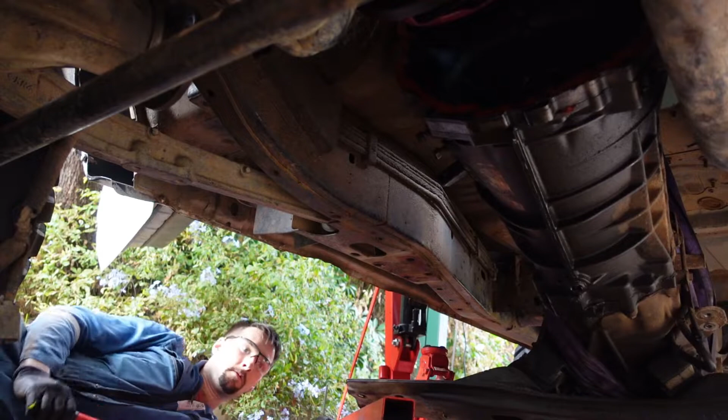In this video we're going to talk about rear main seals in in-depth detail. In my last video you would have seen I dropped the gearbox out of my Patrol in order to redo my rear main seal. When I had the engine out about a year ago, a bit more, I put a new rear main seal in, but I didn't do correct measurements. In fact, I didn't measure at all. I was just, put the seal in, it's going to work. And yeah, it didn't work. So this video is hopefully going to show you that seals are not just this simple install-it's-going-to-work-every-time thing. There's quite a lot of engineering involved behind them, and it takes a lot of preparation for them to work correctly in the environment that they're installed in.

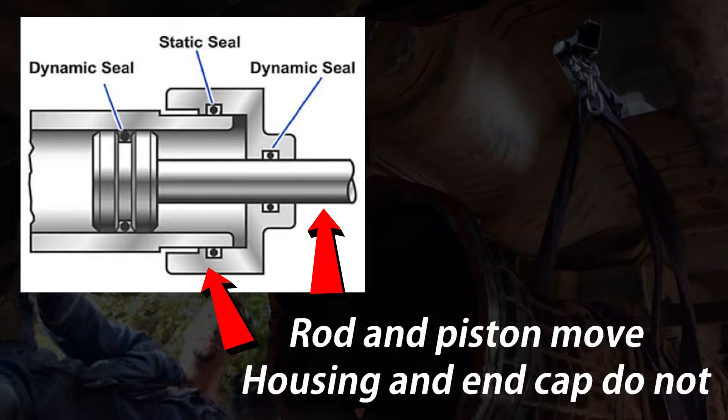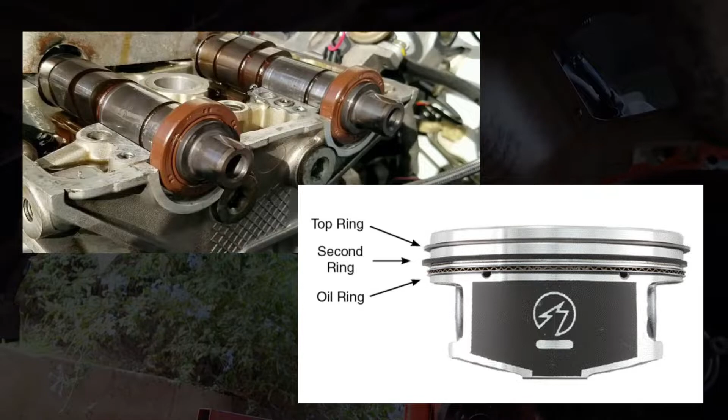So, what is a seal? There's a couple of different types of seals we can talk about. The rear main seal itself is what's called a lip seal, which is known as a dynamic seal. There are two different types, static and dynamic. A static seal is any kind of seal, made of metal, rubber or plastic, that is clamped between two unmoving objects - the best example being a valve cover gasket, simply squished between the valve cover and the head to stop oil seeping out. A dynamic seal, however, seals around a moving component. The rear main seal is knocked into the seal housing, which is static and bolted to the back of the engine block.

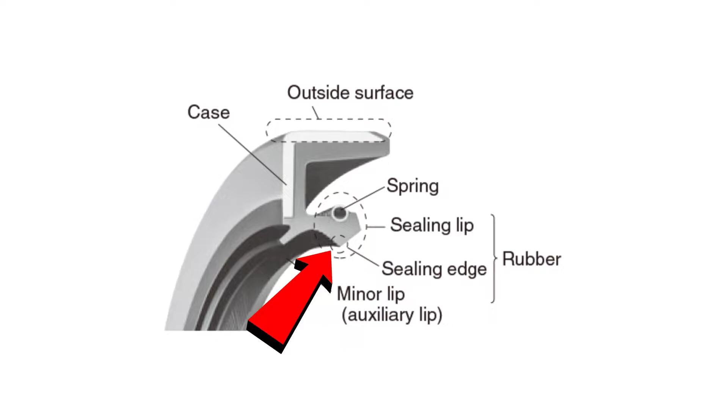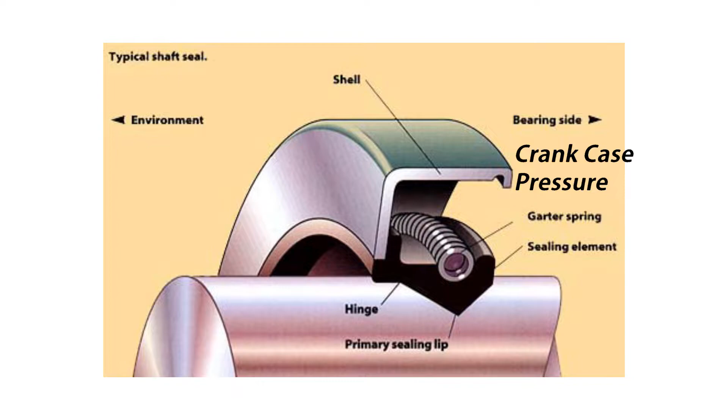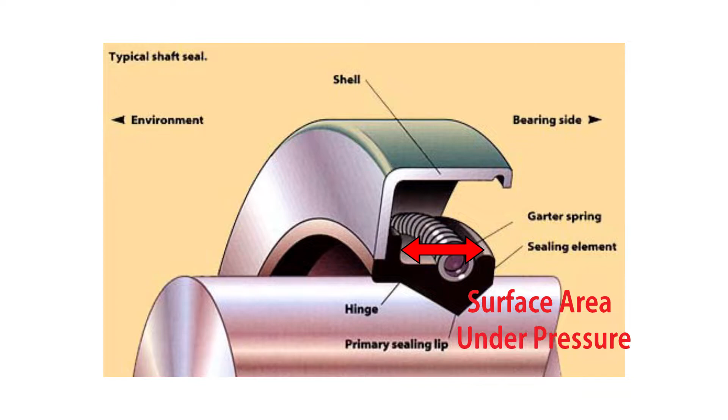The crankshaft which it seals around is constantly moving, meaning it is a dynamic seal. Dynamic seals have a bit more engineering behind them in order to work, which we will talk about, because as I said before, I made the mistake of assuming they were a simple seal, installing one, and it failed on me. So the rear main seal is what's known as a lip seal, a dynamic seal made out of rubber. It has a rubber lip element. When installed, this rubber lip will seal around the crank. There is a bit of flex built into it because it is a rubber lip, however there is also a garter spring around it which creates tension around the lip to hold it around the shaft and stop any potential leaking bypassing the lip. Part of the lip seal design which makes them effective is that because the lip faces towards the engine, every engine will have some proportional amount of blow-by from the combustion process. Blow-by into the crankcase creates a positive pressure, and in this case the positive pressure will aid the lip in sealing onto the crankshaft, because of the area on the inside of the lip seal compared to the outside of the lip seal.

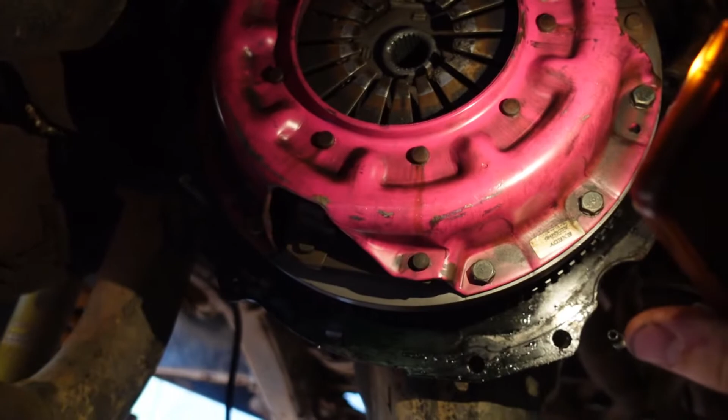Okay, so now's the time to remove your gearbox. If you've watched the last video that I made, you'll know how to drop a gearbox out of a GU Patrol. That being said, this video will cater to any rear main seal, providing it's a lip seal. All you've got to do is rip your clutch off, rip your flywheel off, and we'll go from there.

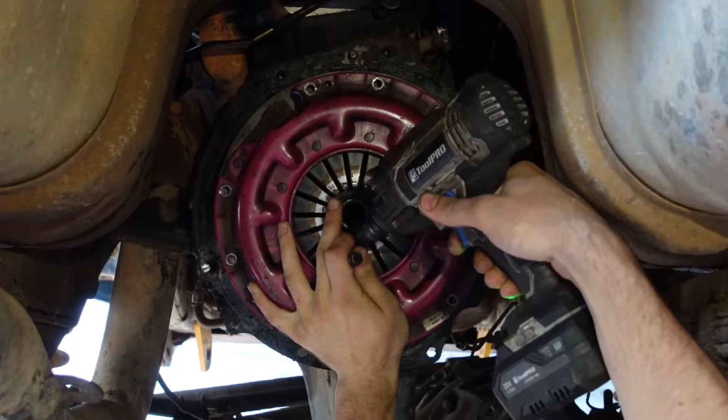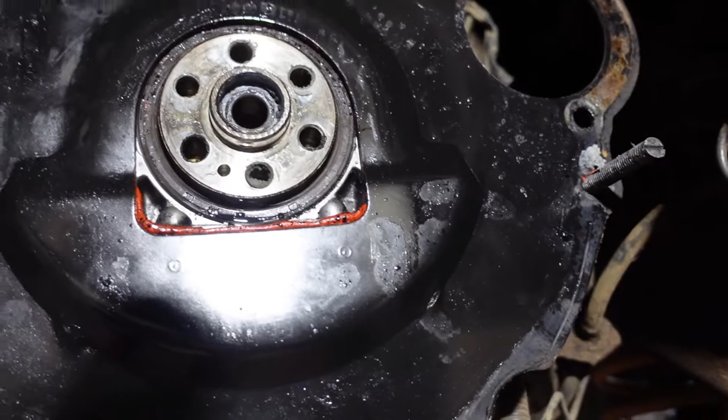Well, there's the problem there - the speedy sleeve is pulling itself off as I'm prying this off. The speedy sleeve should be a press fit onto the crank, so that's probably where the problem's stemming from.

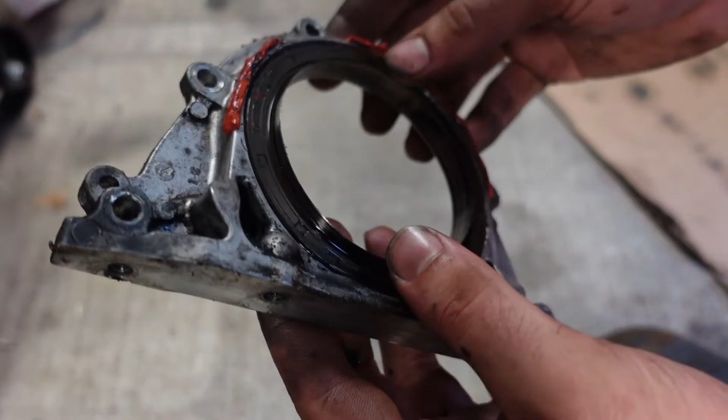So now that we're looking in the light, what you can see is that the speedy sleeve itself has pulled off with the assembly. So the problem is here, the speedy sleeve is meant to be press fit onto the back of the crank. It seems like the last owner that put the speedy sleeve on was leaking oil from the original rear main seal without it, so he threw one on, but he clearly didn't pick the right sized one.

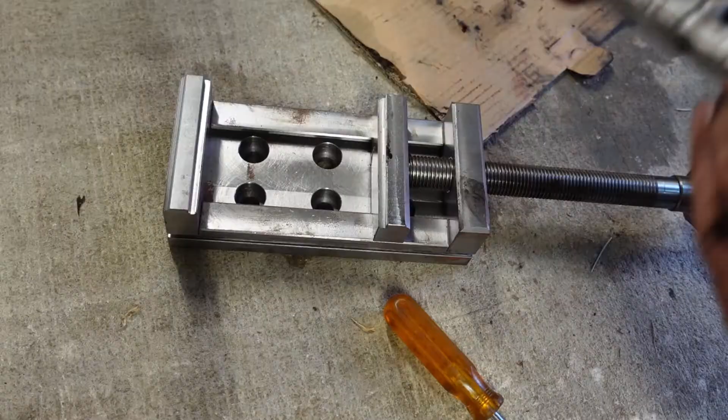So what I'm going to do now is try and pull out the seal. Might need a pry bar of some sort, and we'll inspect the speedy sleeve and the rear main. I've set up my rear main seal housing on a machine vise that I made as one of the components of my TAFE.

Normally, if you're pulling out one of these seals, you can sit the housing straight down and use a seal pulling tool and rock it, and it'll pull the seal up like that, going around it. But in this case, I want to try and preserve the lip element, because I want to see if it was actually malfunctioning and not sealing properly. I also want to visibly identify the sealing area on the lips of the speedy sleeve itself. So I'm going to flip it over, sit it in my vise like so, and use a screwdriver on the back side of the seal, hopefully, and punch it out with a hammer.

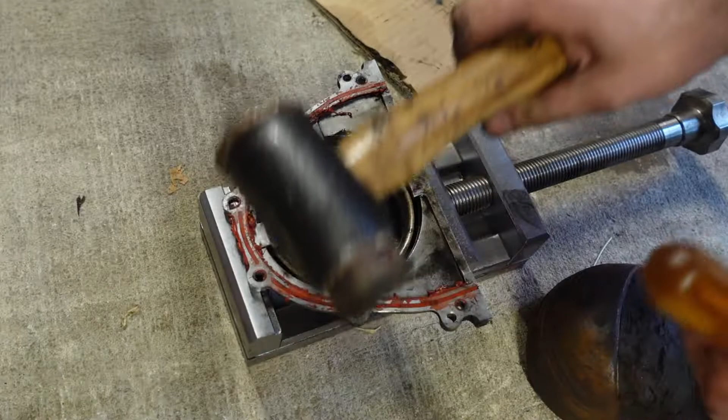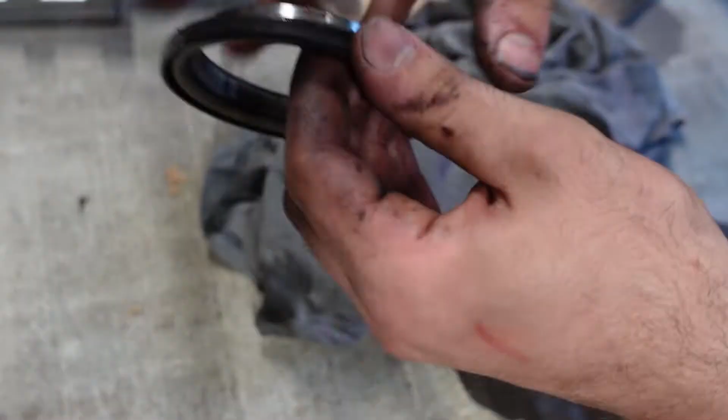I have bought a new seal housing, but it's always a good idea to try and preserve your components as best you can. So now if we wipe everything off, we'll slide the sleeve out, and let's take an examination of this lip here.

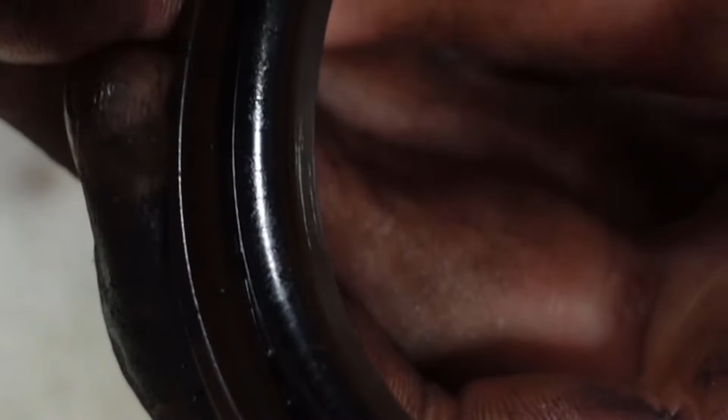In most cases when you run a speedy sleeve, you'll press it on and it'll stay there for the life of the vehicle. But it's pretty clear in my case that was not happening. With the rear main seal I put in when I had the engine out, let's see if I can get the camera to focus on it. What I think's happened is it's ridden itself up on the back corner radius here on the speedy sleeve, and dug into this groove here, you can hear that, and that's caused damage to the seal, and in turn caused seal failure.

However, I think what's also to blame is the fact that the speedy sleeve wasn't a press fit, meaning there was ability for oil to bypass. And considering that my engine is pretty old, it breathes kind of heavy, there's a lot of blow-by, and reasonably high crankcase pressure, it was just pushing past the loose speedy sleeve.

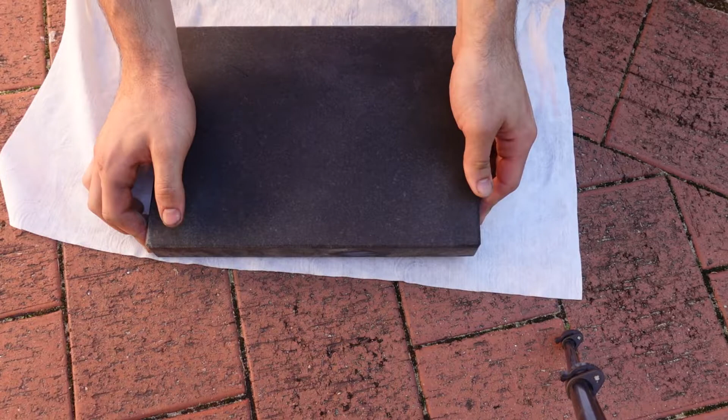An extremely high recommendation of mine would be to go out and source yourself a surface plate. A surface plate is a completely uniformly flat, or almost uniformly flat, plate, used in any engineering sense where precision measurement is required. You can get granite or cast iron surface plates. I preferred the granite one because it's not going to corrode or rust. A good surface plate is surface ground almost perfectly flat, with the difference between the highest and lowest points smaller than 2 microns, which is 0.002 of a millimeter, also known as a bee's dick.

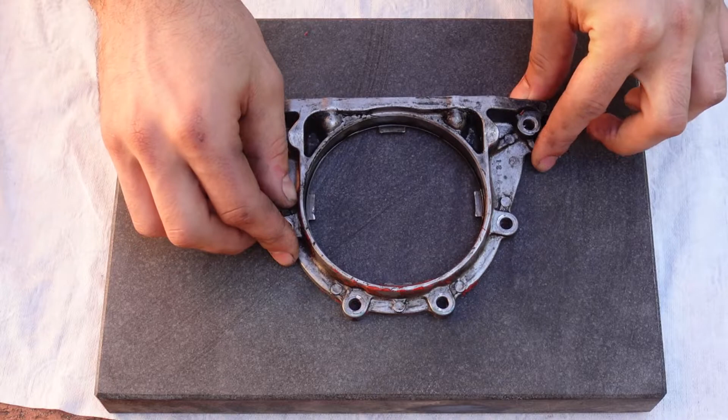It just makes precision measurements, or even just measurements in general, much more precise and much more satisfying, because there's a few tricks you can use this plate for. One of the first tricks is gauging audibly if a piece that is meant to be flat is indeed flat. The way you do this is you sit the piece on the plate and then just tap it around with your finger. If you get any kind of clicking or feedback sound from the workpiece, this tells you the piece is not flat, because if it was perfectly flat, there wouldn't be any high spots allowing it to rock back and forward and create the audible sound.

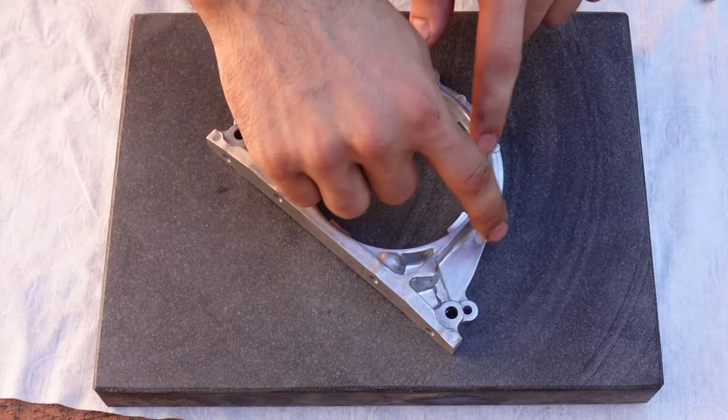The next really good trick that the surface plate allows you to do is utilizing what's known as engineer's blue. This is blue dye, a thick oil mixed with a blue dye, I think it's called Prussian blue. This is marking out blue, which is used for anything where contact is gauged.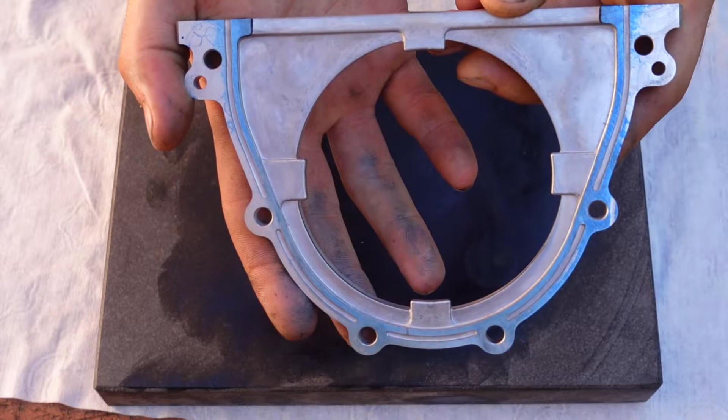With the blue spread out nicely, we're going to rub around our rear main housing. As you can see, once I pull it up, there's perfect uniform blue all over the sealing area on the rear main housing. This tells us, because it's a new piece, that it is perfectly flat from factory, so it passes my QC inspection.

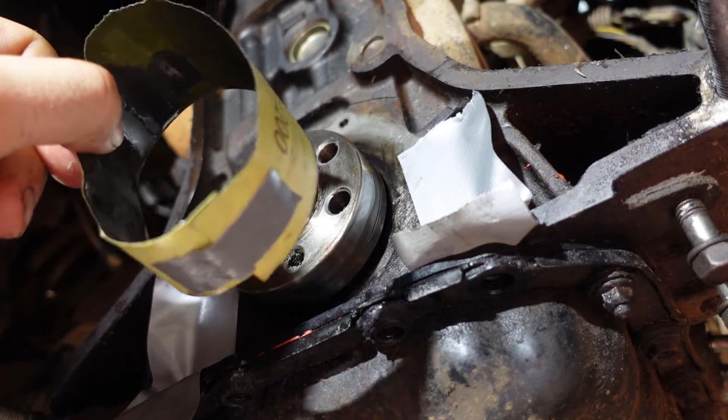Before we take any measurements of the crank journal, we're just going to give it a polish. Using 1000 or 1200 grit emery paper should be fine. A trick to polish up round journals with emery paper is to get two pieces, sticky tape them together at the exact outside diameter, put them on, then use a bit of string wrapped around once or twice so you can go left and right, which spins the emery paper around and polishes the whole crank journal evenly.

If you do it by hand with just one piece, this will be more than fine. It's okay to do this, just try to polish the same amount on both sides. There's not really much chance of creating a high spot because it's only 1000 or 1200 grit paper, but it's good practice to always try to evenly polish any sealing surface.

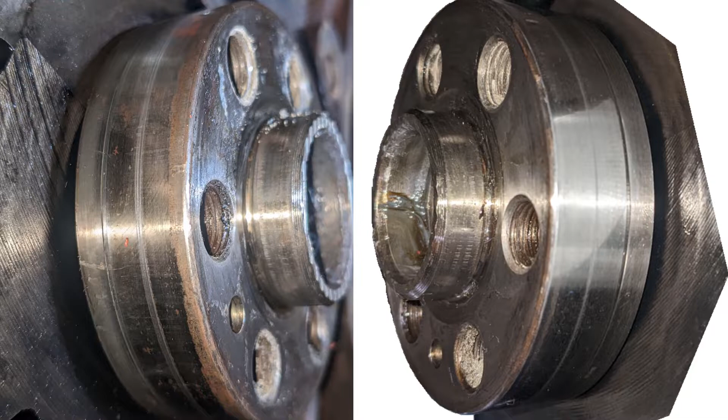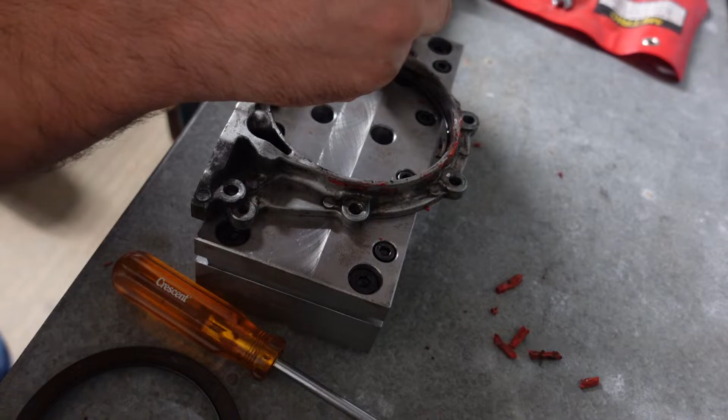For all of our measurements, you can see here I'm using the back of my bench vise. I took all these measurements again once I had the surface plate. I just used a vernier with the depth gauge off the back of it. You can probably use a steel ruler or whatever you want, as long as your eyes are good enough to see the measurements. The first important measurement we're going to take is the rear main seal housing.

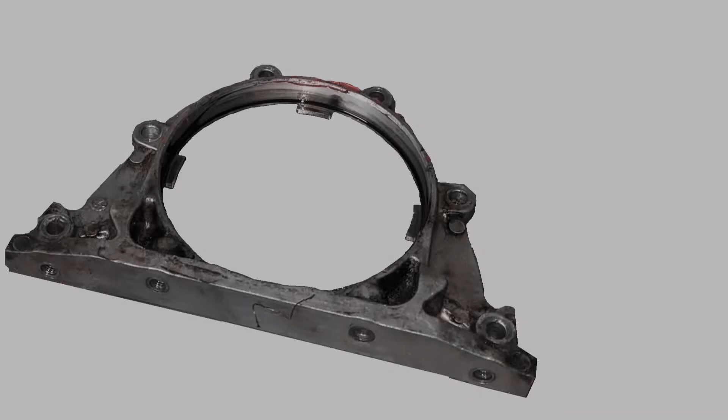The rear main seal housing has this little tab in it, which the back of the rear main seal sits against, and this moves the whole position of the rear main seal outwards. In this case, the tab sits 4.5 mm up from the rear of the housing.

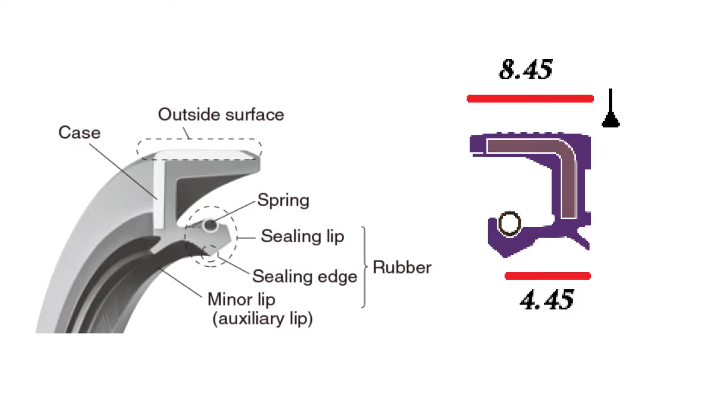The next one, the rear main seal, we're going to measure. The overall length of the rear main seal is 8.45 mm, and the length from the front of the seal to the rear lip element is 4.45 mm.

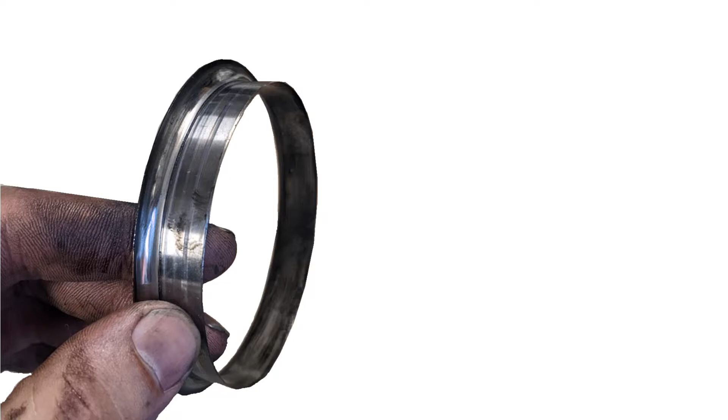If you really want, you can measure your speedy sleeve as well. However, the measurements for this aren't going to be accounted for in the stack height calculations.

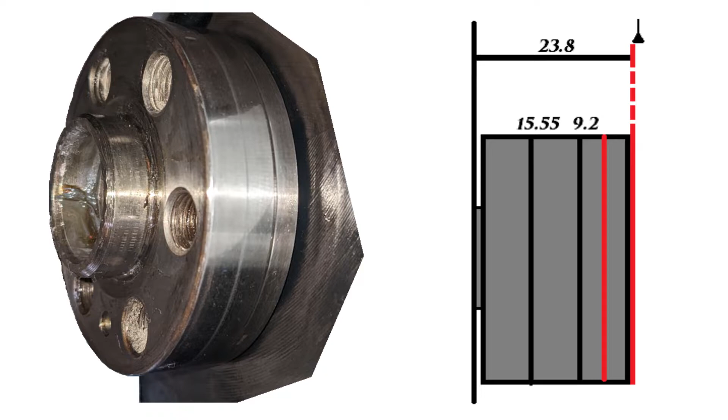Finally, the rear crank journal. There are two visible marks in this crank journal. The first one is 15.55 mm from the front of the journal. This is quite a deep groove, you can pick it up with your fingernail if you run over the top of it, so it's more than 0.1 to 0.2 mm deep. The second one is just barely visible, you can't feel it with your fingernail.

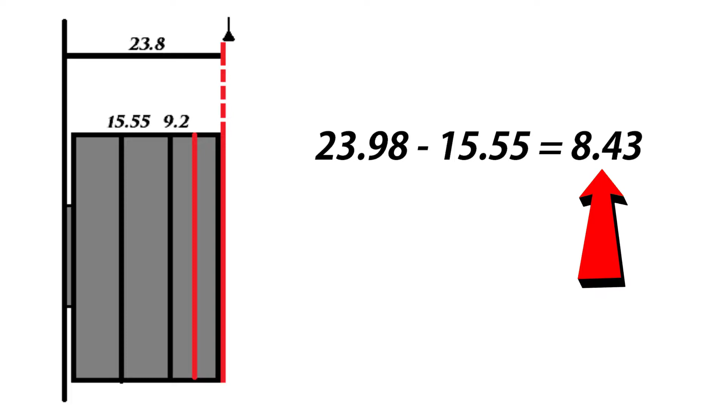If we take our overall measurement of the length of this crank journal and take away the 15.55 mm, which is the measurement from the front to the deep groove, this gives us the remaining length, which is 8.43 mm.

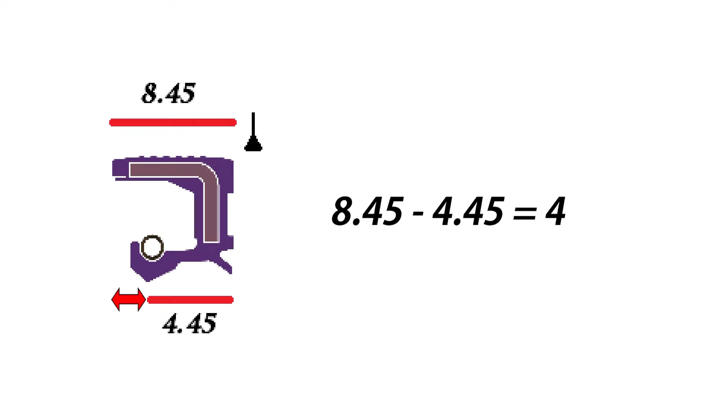So 8.43 millimeters. If we are to determine whether this groove is indeed caused by a rear main seal, we'll take the 4.5 millimeters, which the rear main seal housing spaces the seal out at, and then we'll calculate the overall length of the rear main seal, take away the length from the front to the rear lip element, and the remainder of this is 4 millimeters. So 4.5 millimeters plus 4 millimeters equals 8.5 millimeters, and this is almost perfectly accountable for the 8.43 millimeters that we have calculated.

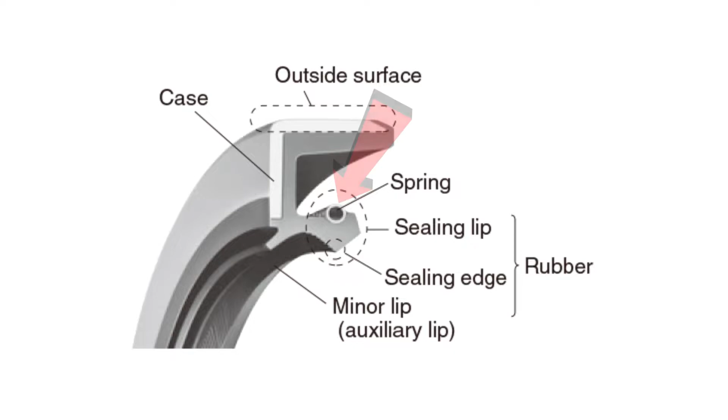So I have reason to believe that this groove has been caused by a previous rear main seal. What's most likely happened is there's been a rear main seal on this crank for so long that the rubber has worn down, and the actual spring that holds tension on the lip has started digging a groove into the crank journal, which has stuffed it up.

So what would have happened is the last owner saw this, decided that putting a speedy sleeve on was the easiest fix, and made a mistake by not putting the right one on.

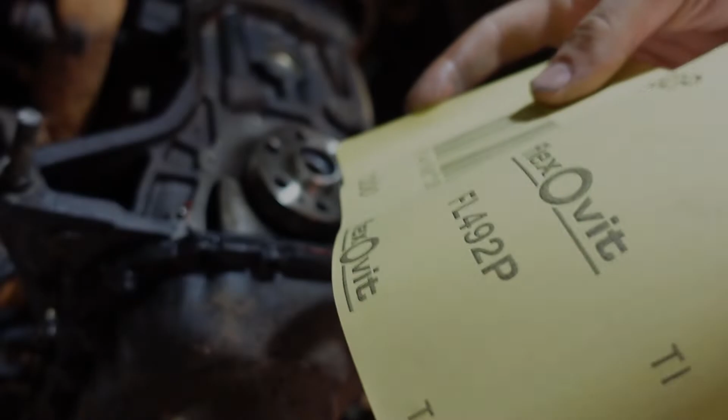So how are we going to fix this? Well, some people would say that this crank is now stuffed because you can't fix it. The only way to fix it is to get a new crank or somehow get it welded and machined back. But there's a much easier way to fix this.

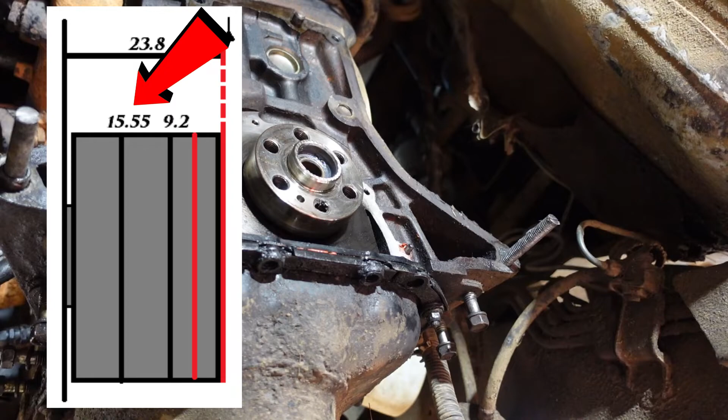What we're going to do is move the position of the seal so that it rides on a nice new polished section of the crank. We're going to make a ring which sits behind the seal, sits against the spacer on the rear main seal housing, and moves the position of the seal.

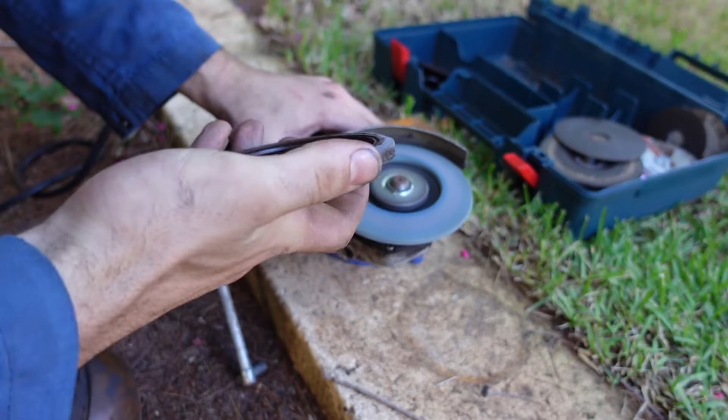If you really wanted to, you could get a lathe and machine up a ring which perfectly sits in there. However, because I was doing this job on the weekend, I had the next best thing. So I used my big angle grinder with the cutoff wheel, and I cut a ring out of the old rear main seal. The rear main seal itself is composed of a metal endoskeleton with a rubber outlining on this metal ring.

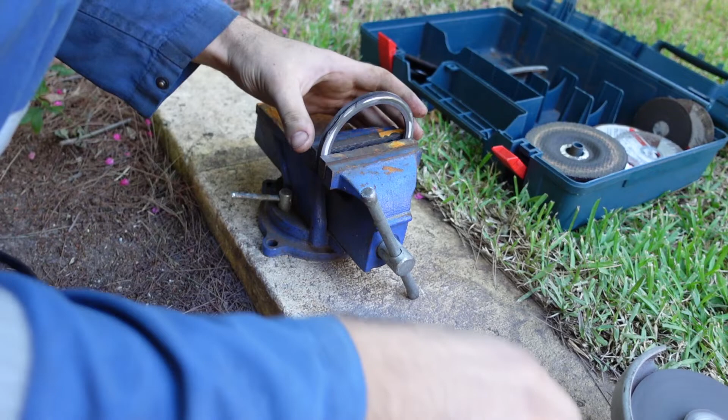With the rough ring cut out, I then used a flapper wheel, which I carefully polished down the ring until it was almost perfectly 2 millimeters uniform thickness all the way around. This is quite difficult to do. There's probably a much better way to do this, or a much better material to use. But this is what I used, and it was good because it was almost the perfect right size, and when you pushed it into the rear main seal housing, it didn't fall out. It was held there nicely.

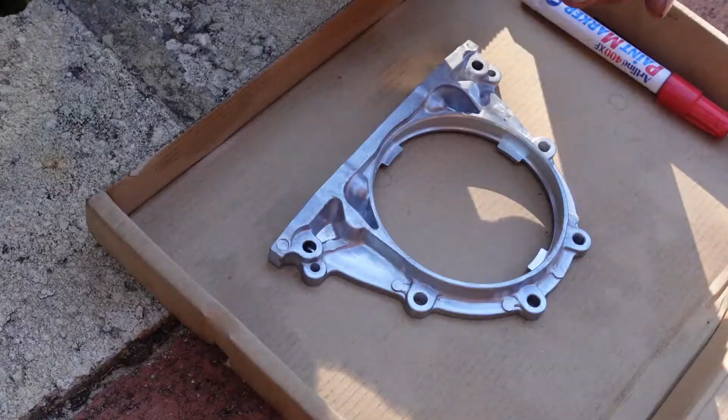So with the ring made, you can press that into the rear main seal housing. Just make sure that you've polished up any potential contaminants, so you've taken any burrs of metal off or anything that could compromise the new rear main seal. Press this one in and bottom it out against the tabs on the rear main housing, and then you should be good to push the new rear main seal in on top of it.

2 millimeters of thickness is going to shim our whole rear main seal out from the damage on the crank journal to a nice new polished section of crank.

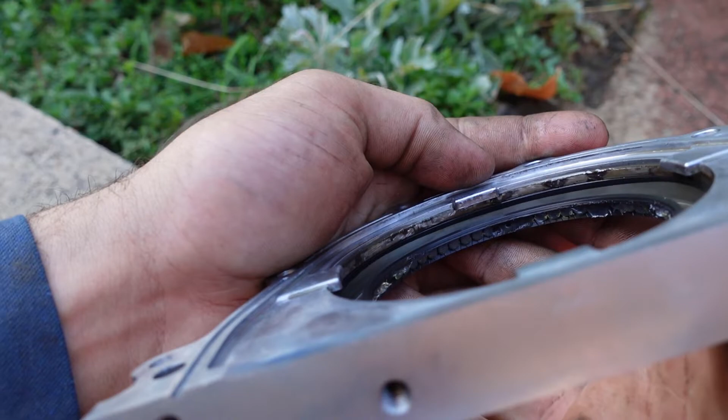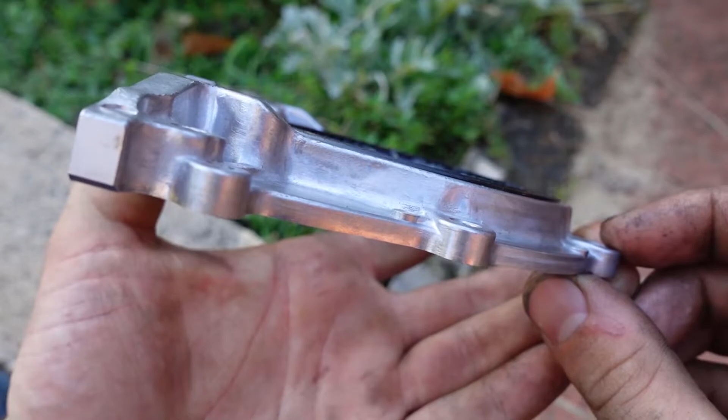Once your seal's knocked in, just have a bit of a look around and make sure everything looks like it's seated correctly against itself. You can see with my rear main seal here, because this is meant for an RD28, the place that makes them, I believe it's Golby's Parts, packs them with rubber grease. Also just throw your eyes across the front of the rear main housing with the seal in it and make sure the seal looks like it is seated flat in there. If it's on the slightest bit of an angle, it may not matter, but it's always a good idea to have it as perfectly 90 degrees as possible.

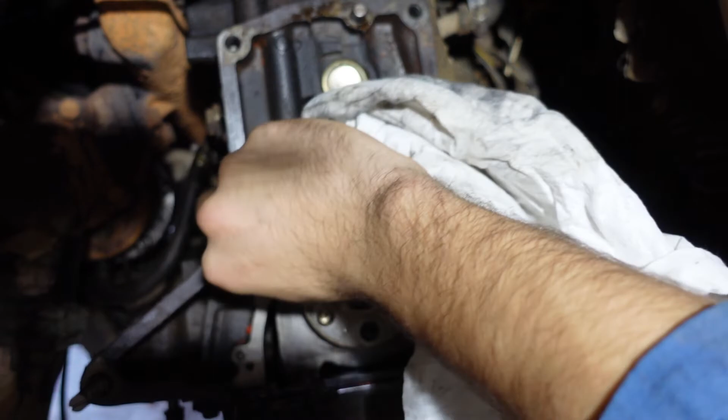So once you're happy with how your rear main seal sits, you can clean up the back of your engine block where the housing is going to sit, because you're going to need to use gasket maker, and then you can start throwing the gasket maker on your rear main housing.

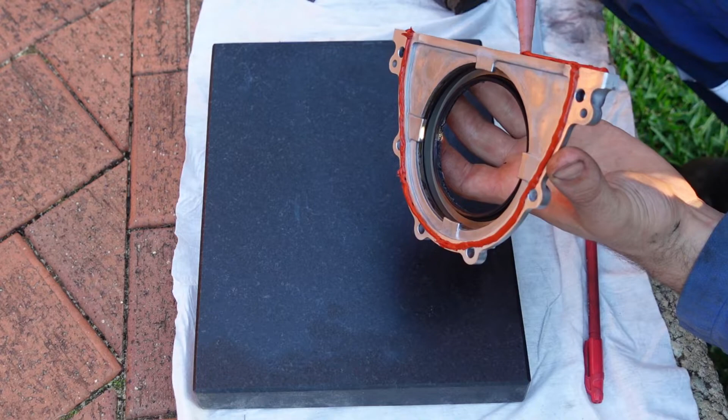I've always used the red stuff for oil pan sumps and rear main housings. I'm sure there's a better gasket maker to use, but this stuff's always worked for me, so this is the stuff I use. You need to throw a big bead all the way around the back of the housing, and then a little bit of a bead underneath the housing where it's going to connect with the sump gasket.

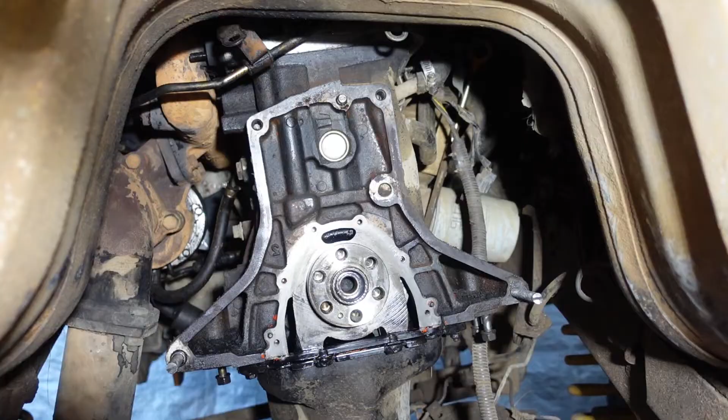If I could do this job again, it would probably be a much better idea to undo quite a few of the sump bolts and rock the sump down a bit when you put the rear main seal back on, just because it was almost impossible for me to push the rear main seal on with the sump gasket there. When I ended up pushing the rear main seal on, folding the lip past and getting it onto the journal, it pushed the sump gasket in a bit, and I had to use a self-tapping wood screw and screw that into the rubber gasket a tiny bit just to allow me to pull it back and align the bolt holes so I could get the bolts into the bottom of the rear main housing. But apart from all of that, it's a relatively easy job.

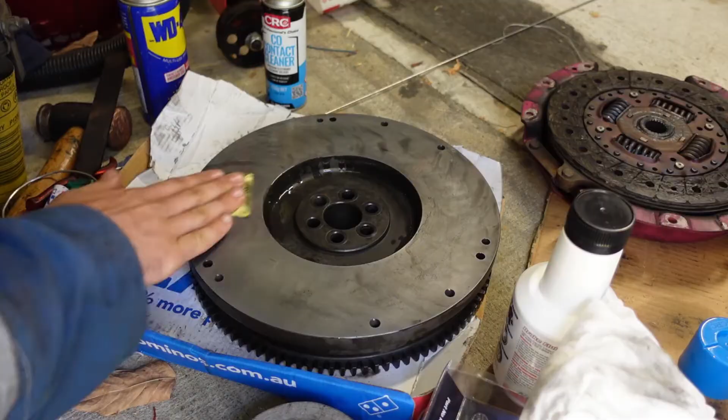It's better than taking the whole engine out. Do your bolts up and you can start torquing them up to the sequence after you've let the gasket maker dry for about an hour. And then it's full steam ahead, cleaning everything up.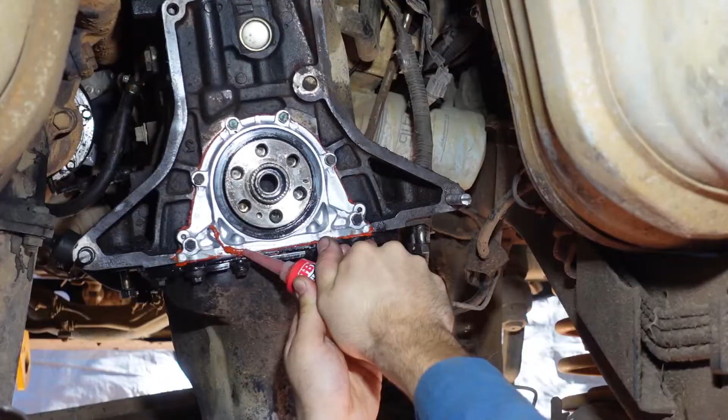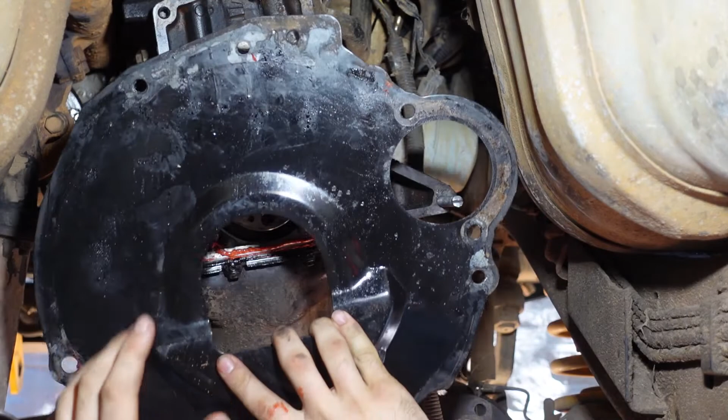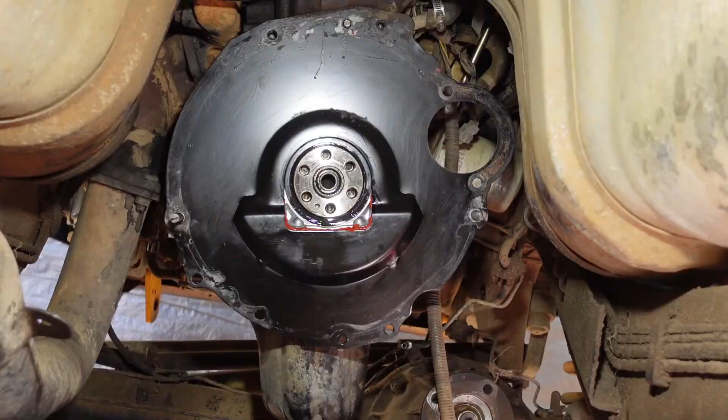Whenever I've installed plates like this, I always use gasket maker when sealing them to the engine. A lot of people say you don't need to do this. I've always thought it's just good practice because you don't want water getting into your clutch and bell housing. It's strange because some cars, like the 4Runner I just did, have drain holes and direct pathways for water to get into the bell housing. Whereas with the RD28, if you actually use gasket maker on the intermediate plate, there's no pathways for water to get into the bell housing, providing you've sealed the boot around the clutch fork.

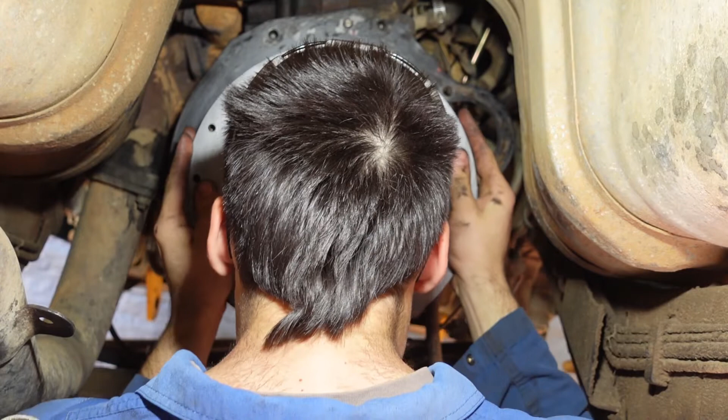So with the intermediate plate mounted now, we can throw on the flywheel. The flywheel's quite heavy, so be careful when you're lifting that up. When you put the crank bolts in, you need to put some anti-seize up in the top corner of them to lower the friction coefficient. And you need to put some Loctite on the actual threads so there's no chance of them working themselves loose as the flywheel operates.

The flywheel bolts get 157 Newton meters of torque. Do it in 3 separate stages, so go 50, 100, then 157 Newton meters with the torque wrench.

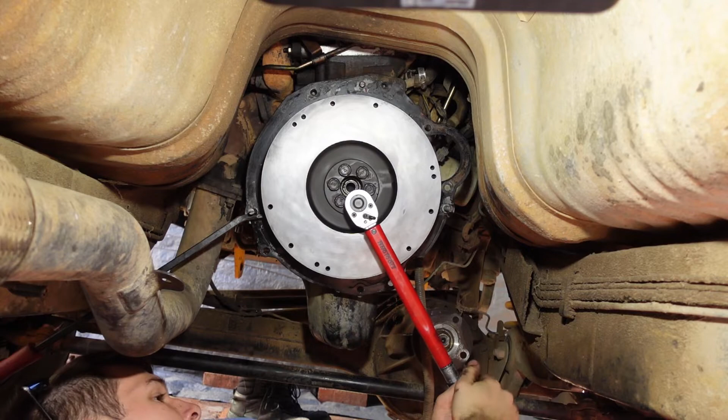Be careful when you do it, make sure you wear safety glasses, not up on your forehead but on your face like they should be. Try and brace the flywheel with a pry bar or something in one of the teeth on the ring gear. It's a bit scary, sometimes it jumps off, so be careful. Make sure you do some stretches before you do it, because yeah, it's quite hard on your back.

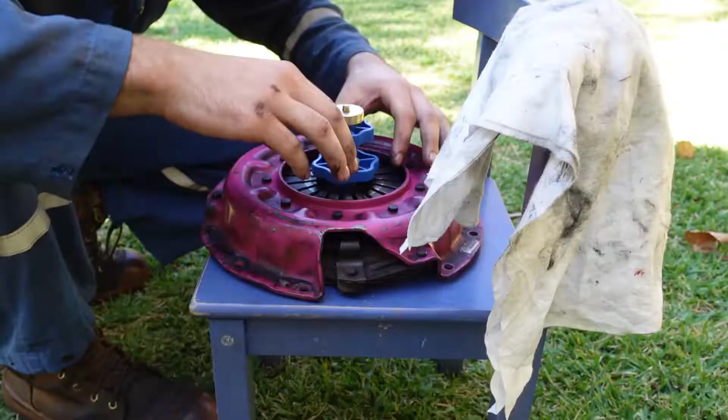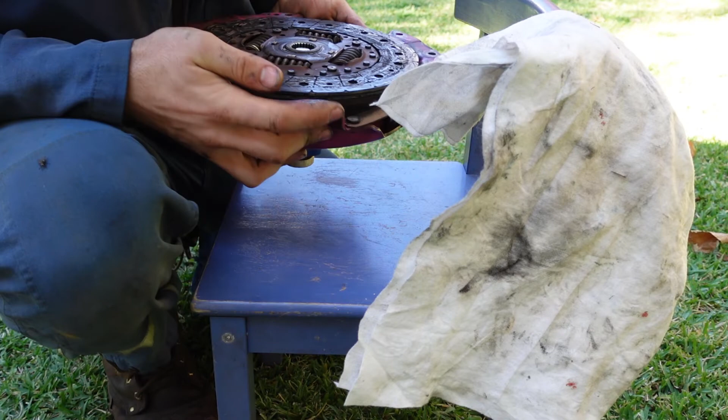So with the flywheel mounted, you can start to clean up your clutch. I didn't have an RD28 clutch alignment tool. I used the fancy Kincrome clutch alignment set. Gotta say, I'm not a massive fan of it. It's a bit of a fiddle to get it together. However, it does work, and it did work for me without much of a problem. That being said, it's a bit more intricate than just using a normal clutch alignment tool. But once it's aligned and you're happy with how it looks, just throw it back on the flywheel, locate it with a bolt, and then do up all the bolts and put the right torque setting into them.

Okay, so we're coming to the end of another video. I'm not going to include the assembly procedure for putting the gearbox back in because it's fairly straightforward. It's pretty much the reverse process of how it was in my strip down video.